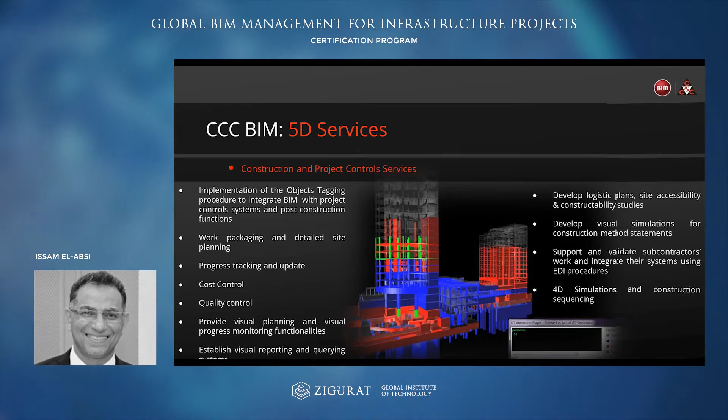And definitely at the end of the project, we need to make sure we are delivering to the client an as-built information model. This as-built model depicts the exact geometrical location and geometrical shape of the facility, plus all the information that is collected about the assets of that facility during construction.

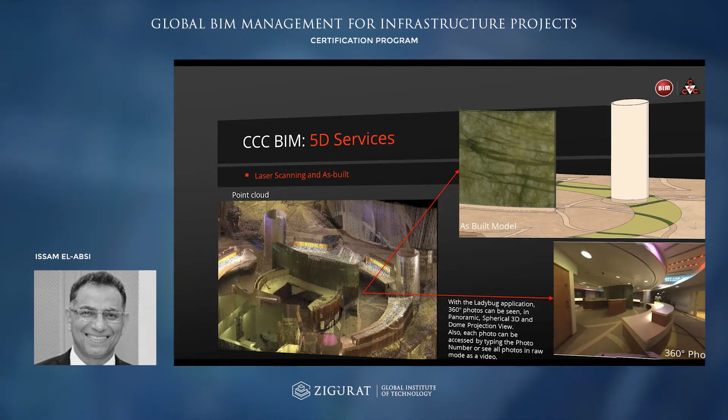All our clients are very keen to utilize all the information gathered during construction for the next 50 years, where they are going to run and manage their facility. That's why, to satisfy our client's needs, we need to focus on delivering the information in the format and the systems they are looking for. So we managed to integrate our BIM solutions with GIS, Geographic Information System, I'm sure you are aware of that, facility management, asset management, and operation and maintenance systems.

Of course, we deliver our information in any standard, including COBie, which is an international standard for delivering operation and maintenance information from construction to after construction.

And since we realized the importance of having qualified and competent engineers in our organization in CCC, we opted to create a BIM Academy. This academy has been running for the last 7 years. And this is an almost 1-year education. It's physical, not online, physical education. And it covers 12 different modules that cover the different life cycle of education.

So what we are doing, we are blending the academy with the practical side of construction, and we are using BIM to demonstrate how we can take things from theory to construction to practice, and how we can leverage BIM to make real benefit to the stakeholders of a project, whether for engineers, for designers, for contractors, for subcontractors, and for the client.

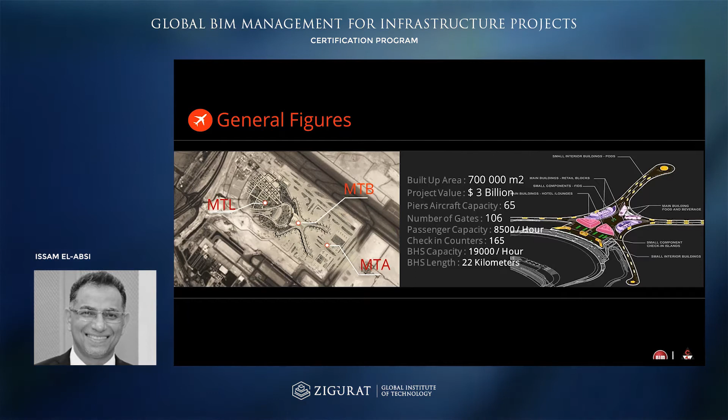To understand more the size, complexity and challenges in that project, there is about 870,000 cubic meters of concrete in that building. The total steel tonnage of that project is about 70,000 tons of steel structure. The roof cladding, which you can see is very complex in geometry, is about 260,000 square meters.

Now, contractually, the client and owner of the airport figured that for a contractor to build this kind of project in that short time, he is requested to follow different ways of working, different methods of construction, different approaches. As such, he figured, why not mandate BIM on the contractors who are going to build that project. And he requested BIM to be used through the different phases, from engineering, during construction and execution, for contractual and variation orders, for manufacturing, and ultimately during handing over.

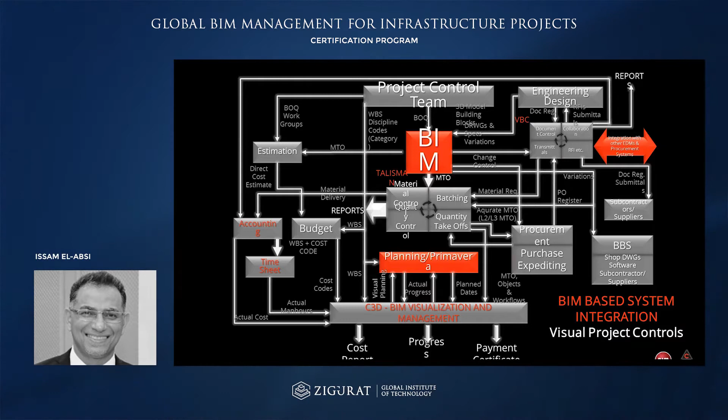And one of the challenges that we faced and we are facing usually is how we make sure that all the different stakeholders, that have different capabilities, different understanding, different history of how to use BIM, how we can put them on the same level and how we can make sure that they are delivering what the client mandated for all the stakeholders.

We have developed something called electronic data interchange. This is a procedure that is developed to make sure that all the stakeholders working on that project are delivering the BIM data in the correct format, in the correct time, and the correct platform. So when we augment all the data coming from the different stakeholders in this huge data repository, we are sure that all the demands are satisfied and the BIM is serving each and every stakeholder so that he can deliver a better construction process. We want the project to finish on time, within the quality requirements, and hopefully within budget.

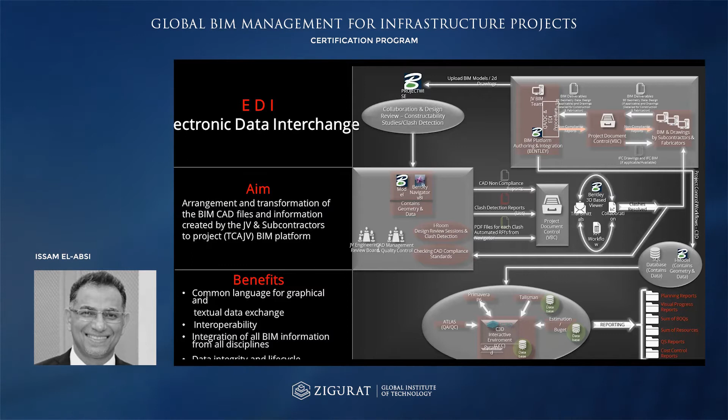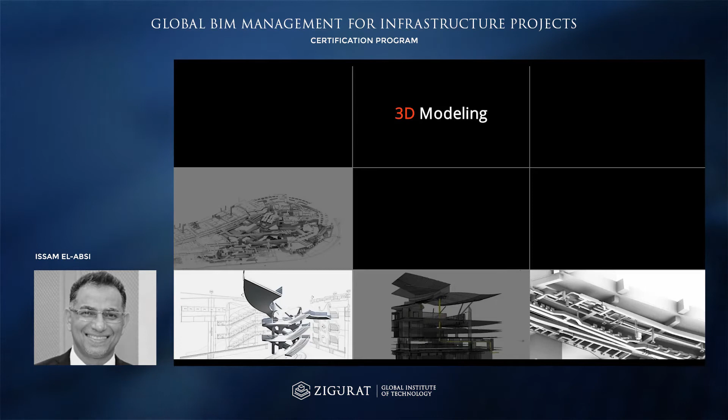So as such, of course, beside the standards and the procedures that we have developed, we figured that we need a very robust and very dynamic authoring platform, modeling platform, that can help us build and create these difficult geometries for all disciplines, of any size. And for that, we were using Bentley AECOsim, which we found over the years is serving us enough. It's giving us all that we need, from robustness to complex accommodation. It can accommodate any kind of geometry complexity. It is customizable and integrated.

One of the major things we are always insisting on having from the BIM model is that it serves as the scope management platform, which means all the project scope is captured in the BIM model, no matter how big or small. All the disciplines are captured in the BIM model. Any change or variation is captured and maintained from the model. And we have illustrated this very well in that project as well as in other projects.

The second thing, to be able to integrate the BIM 3D environment with other systems, you need a method of integration. This method of integration can only be achieved if you create an asset tagging procedure, which means each and every 3D object in your model has a unique identifier that can talk and can be linked to other systems such as quality control systems, your scope management solution, your document management solution, and so on.

So we have created a set of procedures and automated workflows that can take each and every asset in that project and give it a unique identifier. This is happening by integrating what we call the work breakdown structure, which is how the construction methodology is happening on site, with the discipline and other parameters that ensure uniqueness of each and every asset.

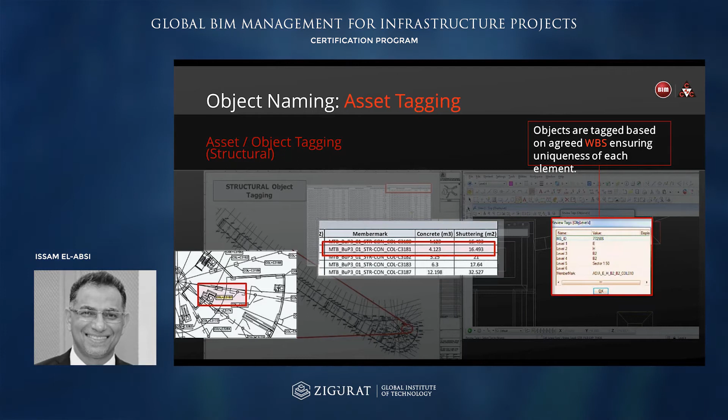And now, since we have this amount of information that is generated every day by us and by others, how can we make sure that this information is distributed to the correct stakeholder at the correct time? So we worked on a collaboration platform that was developed and shared with all the stakeholders of the project, where they can access, upload the data and download the data at the correct time. There is a quality control gate by our team that makes sure that each and every stakeholder is delivering what he should at the correct time, with the correct measures of quality, and according to the procedures and standards that we have developed.

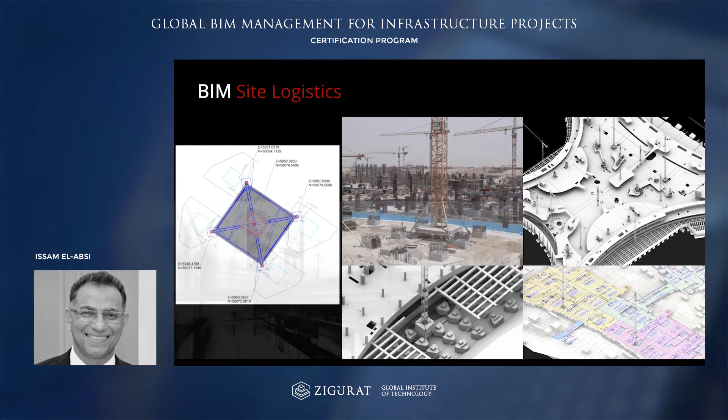Actually, there were a lot of cases where we demonstrated that with the use of BIM and proper what-if scenarios, and integrating that with the time schedule, we could eliminate costly decisions that, if they happened, would have negative effects and costly results on the construction process.

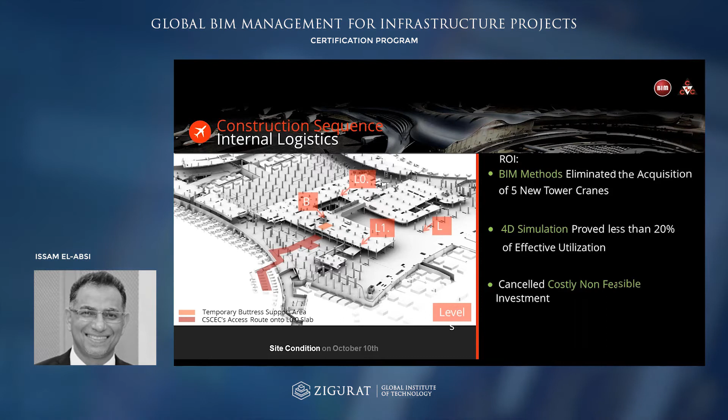And definitely we're using BIM effectively to make sure that clash detection is happening. We are identifying problems in the designs. We're eliminating problems digitally before people go to site and build any area.

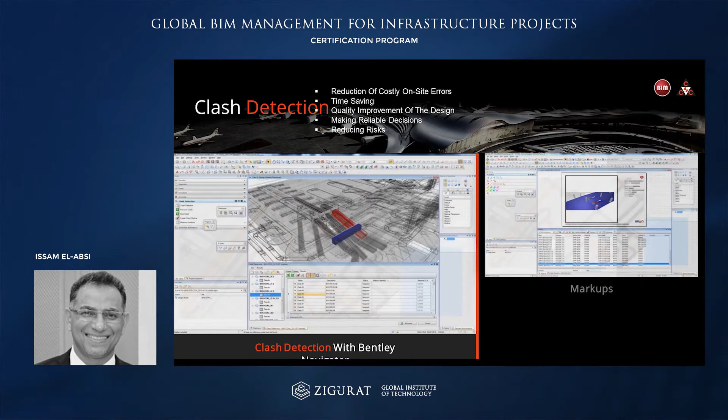And one of the good things is that we have created a system that can extract clashes, and we treat clashes as assets. And these assets need to be managed from the time we find them until the time they disappear. So we want to make sure these assets are kept in a database, and somebody is following these assets regularly, and making sure before we go to construction that these problems or these clashes are resolved.

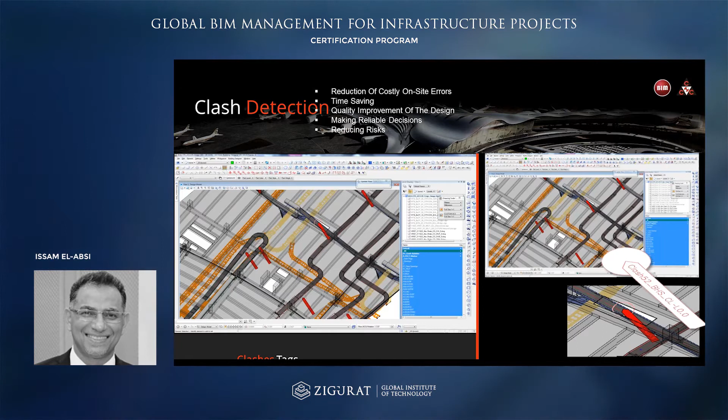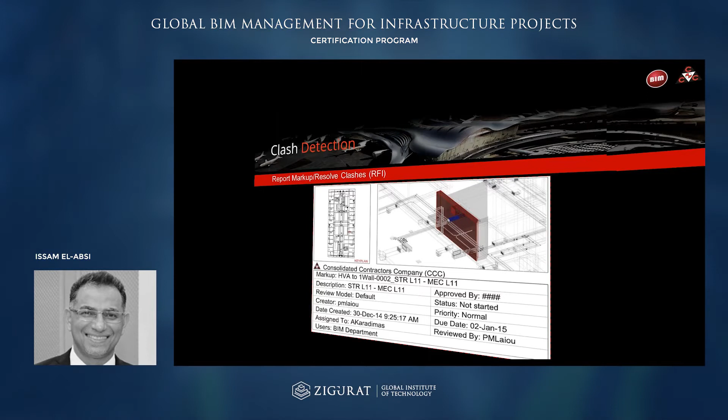And those who are working in the construction business realize the importance of making sure that the concrete elements have the correct openings and the correct embedded items. So before you go to construction, you want to make sure that you have the correct opening in time and the correct size. And of course, if you have an embedded item in concrete, you need to make sure that it is cast in the correct time with the concrete, so you don't have to break or destroy or demolish concrete after you build it.

So we have created a system called opening schedule traceability. And this makes sure that each and every opening is captured in a database, and this database is followed. And it is like managing the process of making sure that the construction team is building that opening in time before we go for construction.

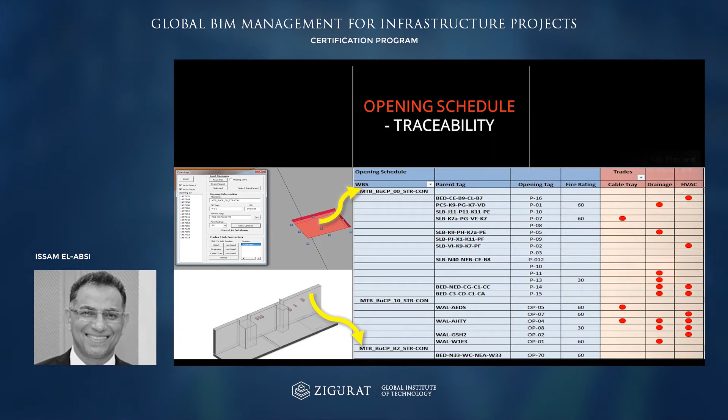This is an example of the opening management report that we give each and every period. We create a report that shows who's the stakeholder of each and every opening, and if it was built or not, and what is the correct size of it, what kind of services are passing through that opening, and what kind of treatment this opening should have, like fire treatment.

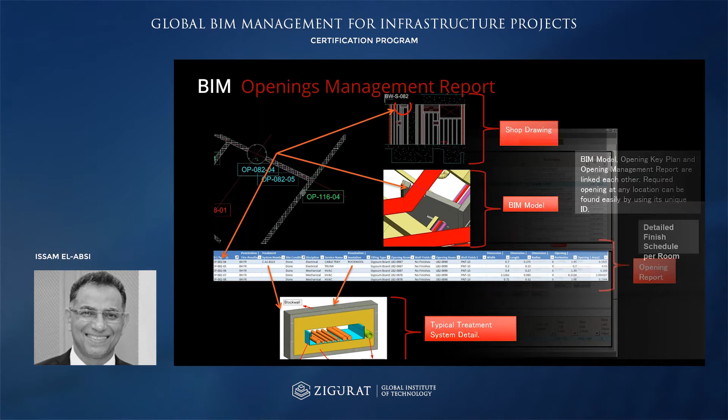And of course, one of the most important things is to make sure that your BIM captures all the spaces, all the rooms, and knows what are the assets, what are the finishes, what are the components of that room. And we have a system that's customizable to cater for finishing schedules and room assets and room components.

Definitely, a lot of 4D simulations happened for that huge project. And we were using 4D simulation to make sure that the client approves the construction schedule. And from our perspective, 4D simulation should not be only integrated with time. We believe that when you integrate your model with time only, this gives you a false indication of whether this construction schedule is working or not, or constructible or not.

You need to integrate this with many other factors, such as scope, such as labor productivity, to make sure that what you are developing as a construction sequence is good enough for the construction process.

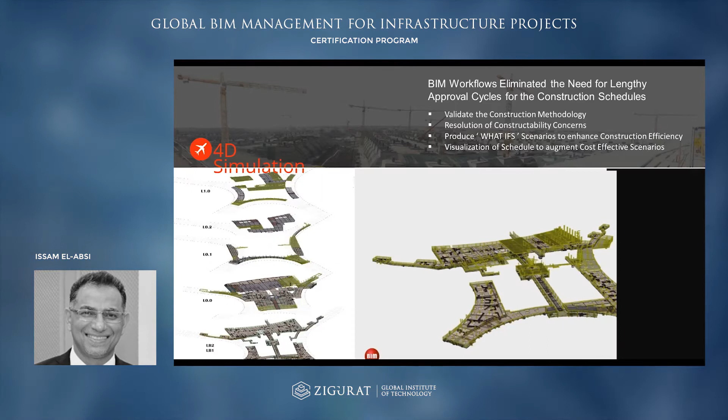What you are seeing is different examples from the 4D simulation that we used to do for the client to make sure that he is approving the construction schedule.

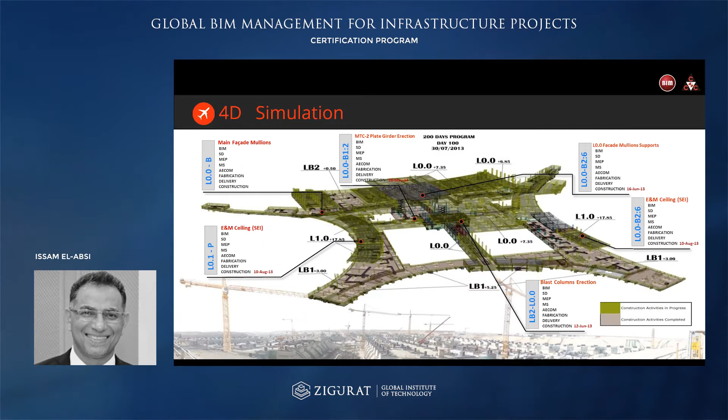One of the major benefits of using BIM is how we manage and capture changes. As you know, for such a big project, we were expecting hundreds, if not thousands, of changes. And we wanted to create a platform where there is complete transparency between us and other stakeholders who are causing the changes. This change might be a result of a variation, might be a result of design change, might be a result of problem or error in construction.

So what we used to do, and we are doing until now, is capturing all these changes and putting it in a centralized database. So for any change, you know the result, you know the initiator for that change, and you know the consequence of that change. And this system was used effectively to manage the different claims that we had with the client, and all the claims were solved in a scientific way, and everybody made sure that he is getting exactly what he deserves or what he earns.

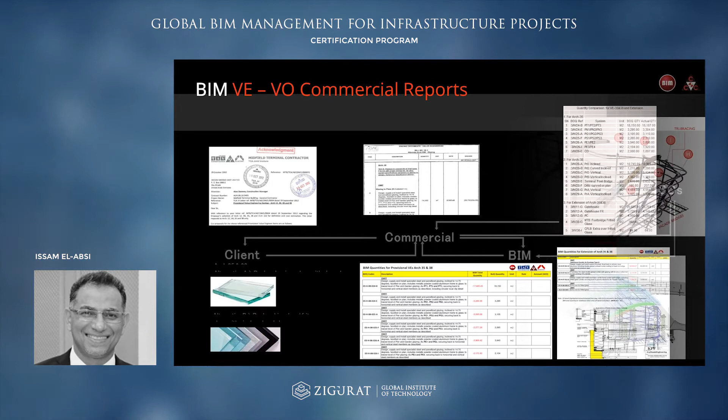Of course, we were using BIM to ensure that the construction methodology is achieved and people understand how they are going to build difficult areas, or they can realize and see what are the construction sequence in difficult areas.

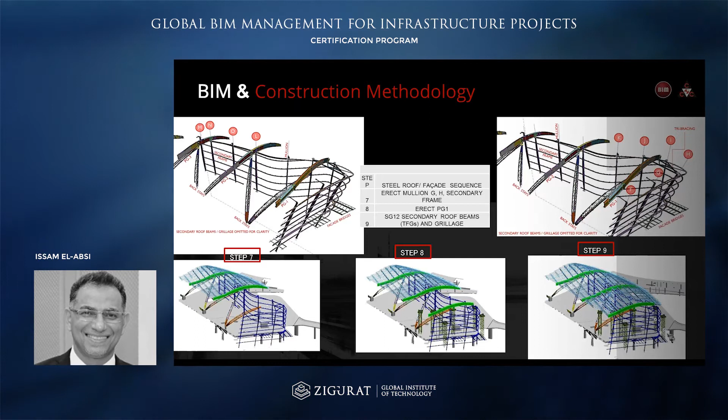One of the very important and successful implementations of BIM in that project was when we took the BIM from design during construction until fabrication. As such, we managed to make sure that the fabricator is getting exactly the correct dimensions for his components. He is getting exactly the correct elements in place, and this saves a lot of time from the fabrication process.

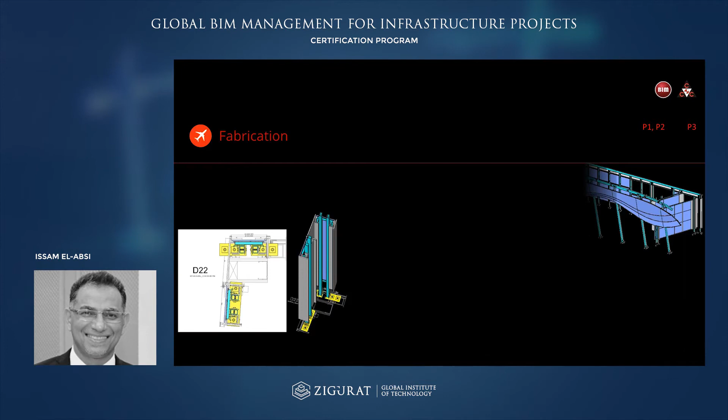And we had really excellent examples that demonstrate if you use BIM effectively from the beginning, having in mind the end, you can save a lot of time and you can help all the stakeholders to deliver better functionality in their business. This is another example of fabrication for some glass panels and from steel, very complex steel elements, components. That's another example.

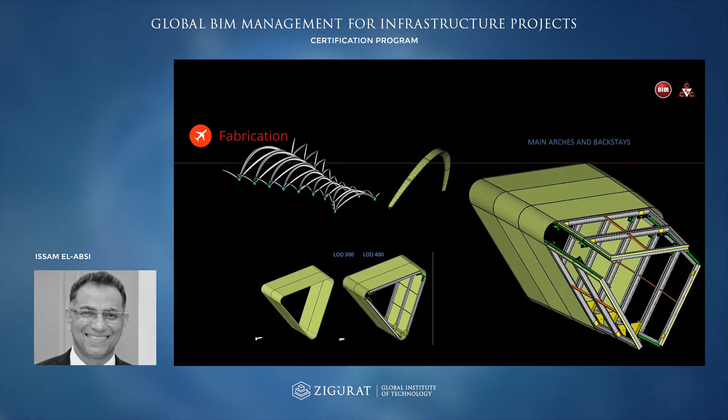Now, as we are approaching the end, one of the very important usages of BIM is how we can manage your relation with others, such as other contractors, other local authorities, other, let's say, neighbors. And for that, we have developed a system called Master Plan, Interface Master Plan. This system captures all the interfaces between the project and others.

And as such, you can know and you should depict exactly where you should finish a certain area correctly, and you hand it over to your neighbor or your other subcontractor or next in line contractor, and make sure that you are not delayed by him and he is not delaying you.

To be able to complete the picture, of course, as you know, BIM is not only about the information contained in each and every asset from geometry or attributes. There are a lot of documents that have to be integrated with the BIM and with the assets, such as drawings, as-built documentation, data sheets.

And we have developed a system that can integrate each and every asset or each and every 3D object with the relevant documentation, with the relevant procedures, with the relevant specs and relevant data sheets. Of course, this is part of the handing over system that we are going to give to the client at the end of the project.

And definitely, one of the things that we used BIM for was leveraging BIM to do sustainability studies. And we have done this for several materials. We have managed to use BIM to make sure that we can better utilize material produced during construction and to serve the sustainable target of that project.

There is a local sustainability that Abu Dhabi is using, and we were forced to demonstrate that we can leverage and use BIM based on such studies.

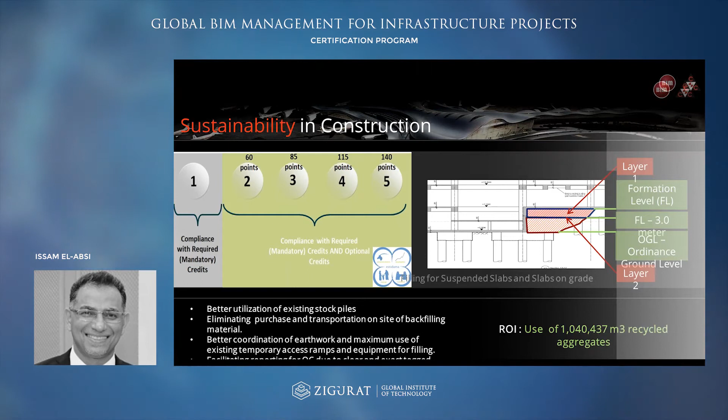And of course, part of the as-built process is to use laser scanning to depict the exact geometry of the facility. And we were using this, we are using this for that project. And of course, we are using the laser point clouds and update our model to reflect the as-built conditions and add to our model all the as-built information that the client would need for post-construction functions.

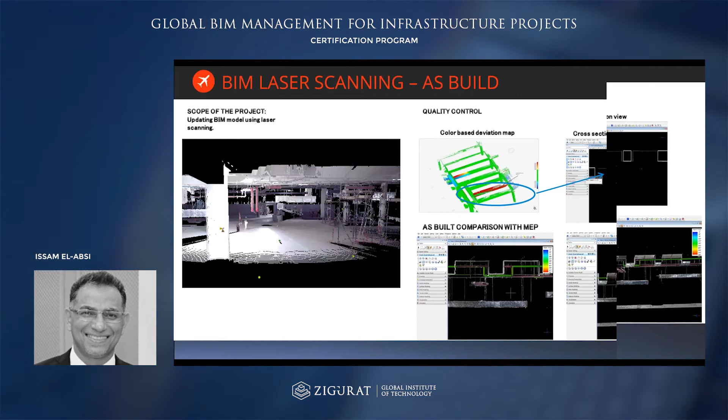At this point, I finished the presentation about MTB project, and I will give the floor now to Alexandra.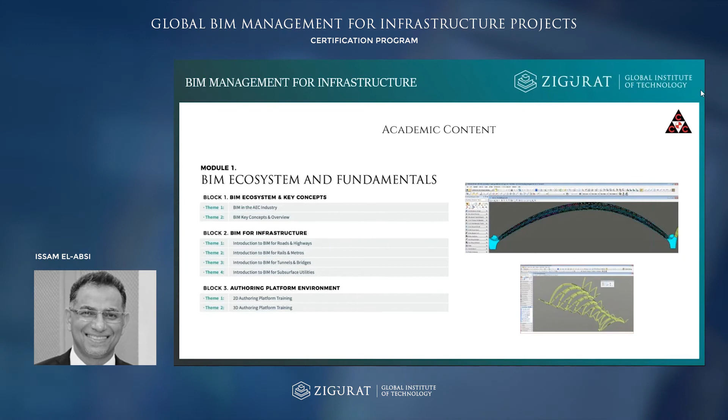As I said, block number 2 is divided into 4 categories. The first one talks about roads and highways, and this will take the student on a journey of how he can model and how he can design his road in a way that can serve the construction process. So we will introduce him to the road fundamentals and the different types of roads or highways that he comes across. We will show him how he can model earthworks and how he can quantify and scope earthworks, which is very important in the construction process of any highway or any road.

He will understand how he can work with the horizontal and vertical alignments. Those are concepts relevant to road engineers. And then we will talk more about the different components of a road and how we can model them and scope them. And then we will take him to advanced topics of road and highway design, such as super elevation and intersection modeling.